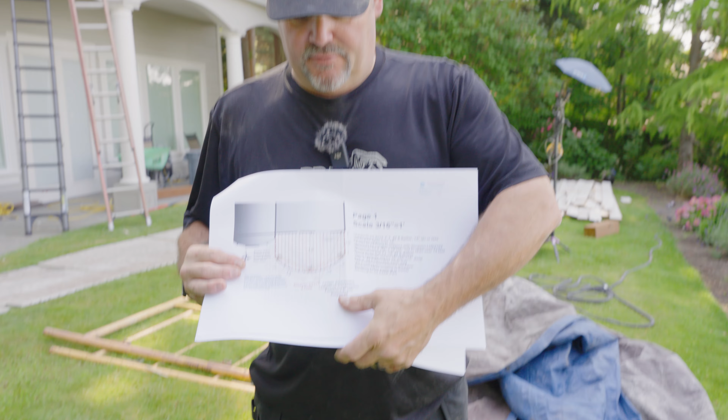Let me grab the plans. This is a permitted deck, and let's talk a little bit about the construction process of this build. All right, so basically, we are improving the lower main deck. We're gonna enlarge it. Right now it only comes out about 8 feet, but what we're gonna do is bring it out 10 feet to the edges, and then we're gonna peak at 15 feet in the center. So there's about a 5-foot carry past the edges here on a curve, okay?

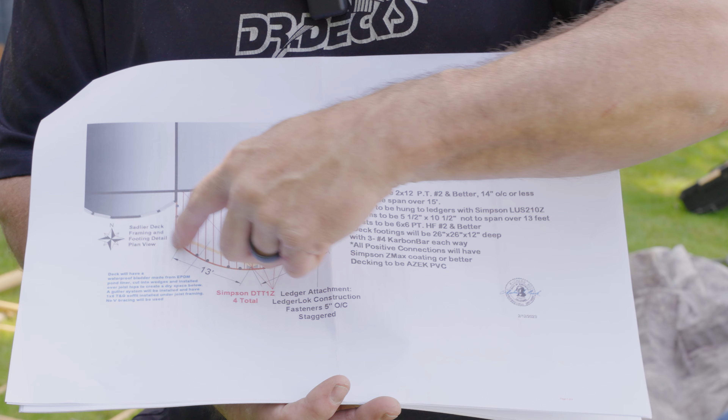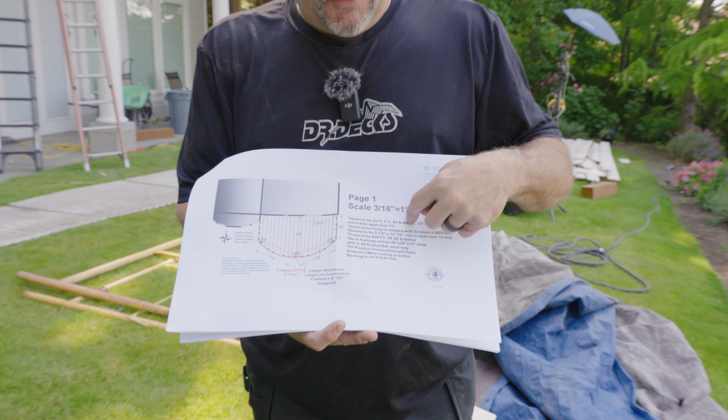I don't remember what the actual radius is of this, but we're gonna be running a couple glulams underneath, and we're putting the footings in a V formation so that we can carry the load and not have such a large cantilever on our joists. To make this happen, we have to use 2x12 pressure treated joists, and the beams have to be a 5.5 by 10.5 inch glulam, not to span over 13 feet. So that means I cannot have over a 13-foot span from the center of this post, where this beam goes here, to here, okay? So the other 3 decks on this house look like this.

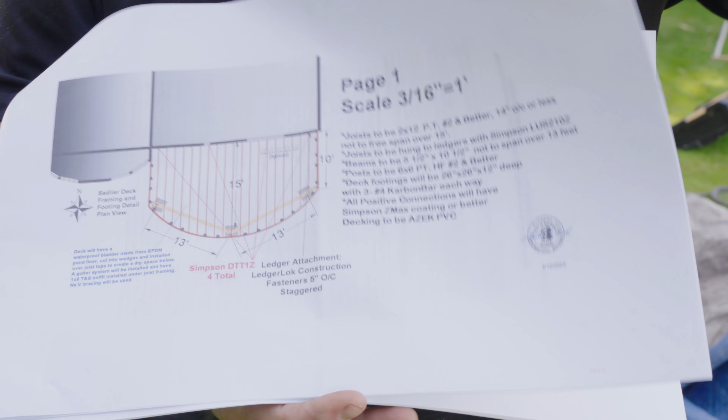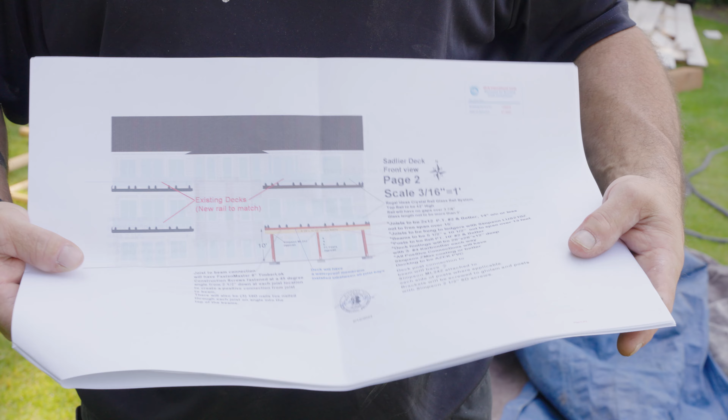So here's all the new construction that's going down. Everything else, these are existing decks, and we're gonna put new railing to match, and we're actually gonna put down some new decking as well. So we have to strip, and all these decks are tile right now, which has been very difficult. This is our 4th day of demolition, and we've only torn off half of the decks on this side of the house.

Now the upper deck on this side is cantilevered through the house with LVL joists. They are 1.75 inches wide by 11.25 inches thick, and there's multiple plies laminated together. They are very strong and they span better than traditional joists, but they have to remain completely dry. No problem, all 4 of these decks we're gonna waterproof.

We're doing a slight modification to this deck here. We're gonna leave the corner on this side as is, but the other side we're actually gonna build it out and make it square. So we're gonna use a little bit of cantilever and some new product to lock that together and make sure that it works well for what we're doing. Everything's gonna be waterproof. Everything's gonna be soffited with clear cedar. This is a very nice project. We're gonna be here for several months, so I hope you guys enjoy the updates as we go.

Okay, so we're doing Regal ideas crystal rail on all 4 decks as well. Let's see if I can get you guys a side view. Okay, so here's a side view, and we're gonna have all the posts. We're gonna do this entire deck in TimberTech AZEK dark hickory. We're wrapping all the posts in dark hickory, all the beams in dark hickory, and then we're gonna powder coat all the posts in dark hickory color as well to match.

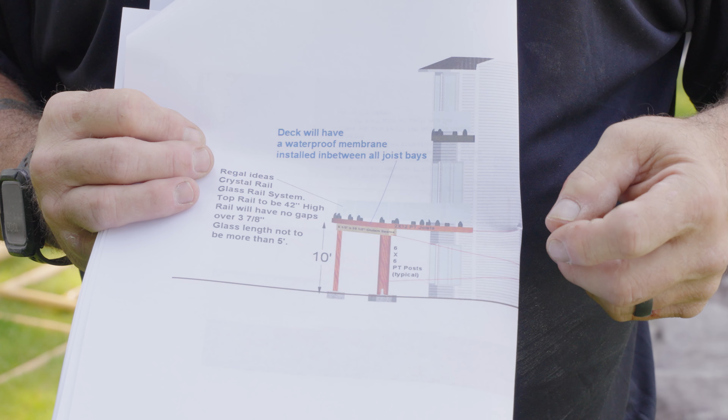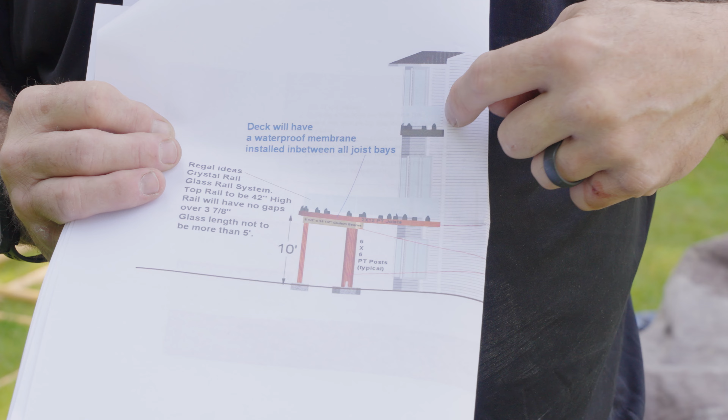So this deck on the upper is gonna match as well, with fascia and details with the same powder coating. And the other 2 decks on this side of the house, which you can see over here, we haven't even touched them yet. But I'm hoping to catch a demo on those as we go, okay? So that's what we're up to. Like I said, it's 4th day of demolition today.

We're just getting to the point where we're ready to pop the plywood on the lower deck, and then we can start dismantling the joists and the beams and these funky posts and these fiberglass columns. I was thinking about repurposing the columns, but I don't know what I'd use them for, so I don't know if I'm going to or not. But mostly when we're in demolition mode, we just want to tear everything apart and get rid of it.

We really aren't trying to salvage too much. Everything I do, I take to a recyclery as it is, and then it gets repurposed. So that usually works pretty well for us. That's the plan. And let's get over here.

I think what I'm doing is we have our Ditch Witch here, our SK800, and we are using that to shuttle materials up to the street, because it's a long carry from the street down to the site and from the site back up to the street. So having a machine that can load into the truck, as long as we cut it down into manageable pieces, really makes things nice when we're trying to do our demolition.

So, as well as bringing other things like tools up and down the hill and things like that. So smaller materials. So right now I'm just gonna get a load on the machine, and then I'll take that up and get rid of it at the truck.

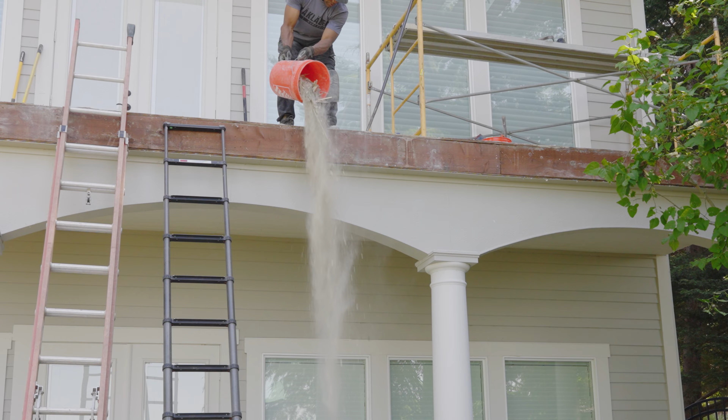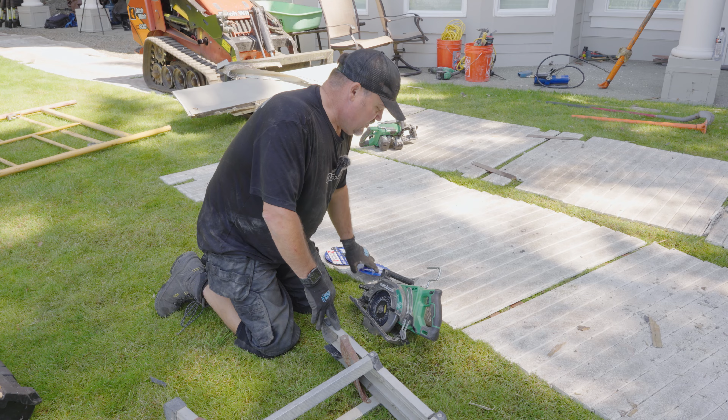Been going through a lot of blades, saw blades on this project. I found these Avanti Pro. They're like a lesser quality blade, similar to Diablo. They're made by the same company. Got them at Home Depot, like 2 for $7.99 or $6.99, something super cheap. They're like $4 a piece. So instead of using a $10 blade or a $15 blade that gets ruined, I'm gonna throw some $4 blades on our Metabo HPT saws.

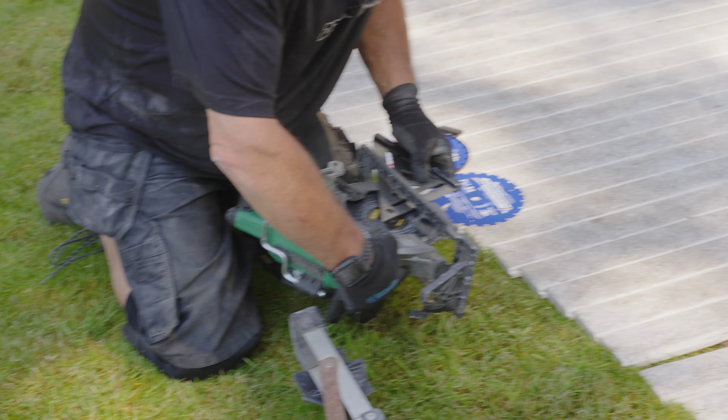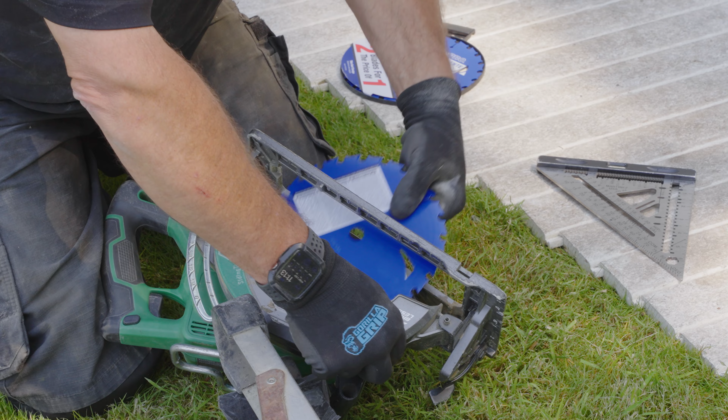And I always am missing the key for the bolt. So I happen to have the right size nut driver right here on the end of my Martinez square. So I'm just gonna lock this in, and you know what they say, righty-loosey. On a rear handle saw, usually it's a reverse thread. So you just pop that off, pop your blade. I don't even worry about taking off the sticker because it's a demo blade, I don't care. A little extra friction ain't gonna hurt. And then lefty-tighty, and then you just drop your handy wrench right back on there, locked and loaded.

All right, so our top deck is stripped and pretty much clean. It's about as far as we can go with it until we get the lower deck torn down and rebuilt, reframed. So the plan is today, get the rest of this deck down and loaded in the truck and gone. And then next week, we're going to dig and pour concrete footings for the deck, and then we'll start reframing the deck next week. The rest of today is just really getting this deck down. I don't care how we do it.

We had to take a more gradual approach at tearing the upper deck down because we had to salvage all the joists. But this deck, we're taking the whole thing out. So it really doesn't matter how it comes down. So we're gonna take a little bit more aggressive approach on it because we can. And because, you know, speed is always a welcome trait when you can use it safely. So if there's any way that we can speed up this demo, we're gonna do it.

I think instead of using our hydraulic jack to push all the plywood, we're just gonna cut in between the joists as much as we can, and then cut the joist and then just tear it down and get rid of it as fast as we can so that we can just dismantle this thing and maybe get out early on a Friday.

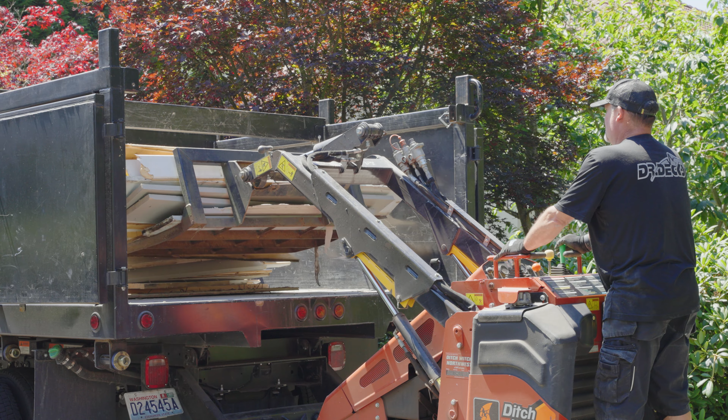One really important thing, don't forget about those cheap blades you can get at Home Depot, because we're about to tear up a bunch, cutting up through some plywood.